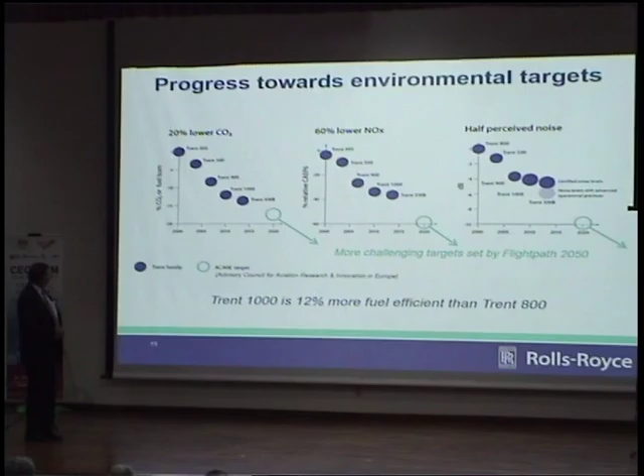Our Trent 1000 engine is 12% more efficient than that first engine. You can see the XWB is even more efficient, as I said earlier. Now, the designer is wrestling all the time with this. It's not possible to minimize all of these things at the same time.

There are basic laws of physics that say if you push down fuel burn, something else will pop up and get a bit worse. So for instance, engine pressure ratio. At the core of the engine, we compress the air to 50 atmospheres. It gets very hot, so the higher that pressure, the more efficient the engine. That's a good thing. But as it gets hotter, when you add the fuel, you create more oxides of nitrogen because you're putting more energy into fusing that air together. So the NOx will get worse as the CO2 gets better.

Bypass ratio is the amount of air that passes down the outside of the engine compared to what goes through the core of the engine. Again, if we make that bigger, we know the engine gets more efficient, but the drag of the aircraft goes up, so we burn more CO2, but then the noise comes down. A big fan turning slower makes less noise than a small fan turning fast.

Although I'm not going to talk more about it today because it's still a very contentious area, the creation of cirrus clouds and contrails from aircraft itself can create global warming, and by flying lower and through different air paths, you can reduce the amount of contrails produced, but at the same time you'll burn more fuel. So no free lunch in any of this is the short message.

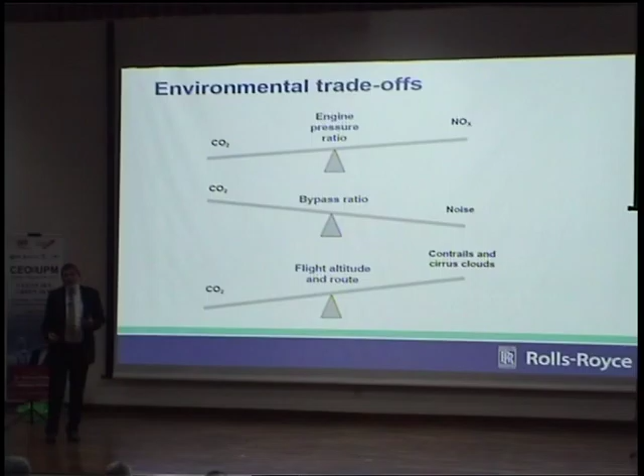Alternative fuels—I mentioned biofuels. Malaysia is particularly strongly placed and has some excellent research in this area, with potential to make biofuel directly from palm oil and from algae, among many other projects going on here.

We've said all along that biofuel must first of all be safe. You could fly an aircraft on vodka if you wanted to—not the pilot, but the engine itself. You could fly an aircraft on vodka, but that wouldn't be safe for the passengers or for the aircraft, and actually the tanks would freeze up at high altitude, which wouldn't be good at all. So you need to make sure any biofuel has the same physical properties as today's fuel. In fact, most certification at the moment is limited to just 50% biofuel mixed with conventional fuel, so you're not allowed to run totally on biofuel.

The second issue is sustainability. Not everything that says bio on the can is good for you, and you have to really look in great detail. If somebody says, I've got a great biofuel, you have to ask: how did you make it? How much energy did it take to create this fuel? How far did you transport the biomass by road before turning it into a biofuel? All of those things are actually taking away. The whole philosophy of biofuel is that when the plant's growing, it sucks in carbon dioxide from the atmosphere. When you turn that plant into fuel, you let the CO2 back out, and that should be a neutral process. But if you create yet more CO2 in creating the fuel in the first place, you're not necessarily doing the right thing.

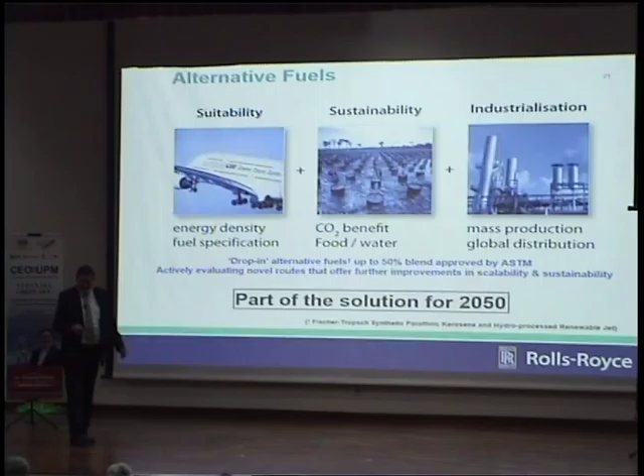So let's have a look at the jet engine, because as I said, it really is—I've been around them for 36 years now, my whole time with Rolls-Royce—but I'm still amazed by them, and hopefully I can convey to you some of the amazing technology that's in there.

So some great things are happening. We suck in about a ton of air to a modern engine. Most of that doesn't go through the core of the engine at all. Most of it goes down what we call the bypass and produces most of the thrust for the aircraft. Think of this fan on the front just like a big propeller.

It's pushing the air backwards and therefore pushing the aircraft forwards. A small part, about 10% of the air, goes through the core, and the Rolls-Royce product is unique in that it has a three-shaft design. So this big fan on the front is turned by a low-pressure turbine at the back. This first set of compressors is turned by its own intermediate pressure turbine, and then at the core of it, you have the high-pressure compressor turned by its own high-pressure turbine, and this is where all the magic happens.

So you suck a ton of air in the front, you add just 7 pounds of fuel per second to each ton of air, and that creates the magic. A little controlled explosion goes on here. The temperature, by the time you get to this point, is already around 700 degrees Celsius. Steel is glowing red hot at that temperature, and that's just by compressing the air. Like if you put your thumb over the end of a bicycle pump and press hard, your thumb gets quite hot. That's all that's happening here.

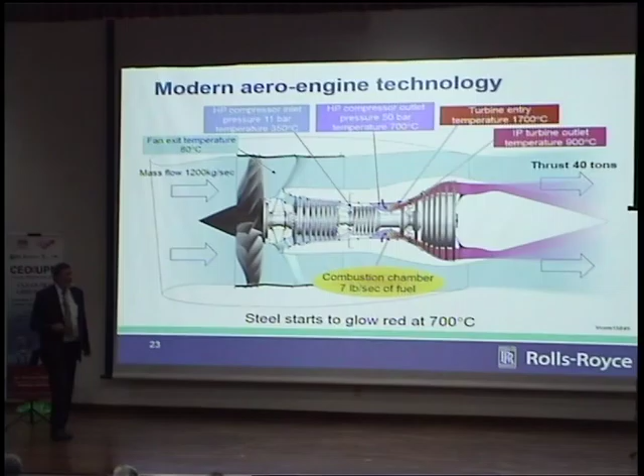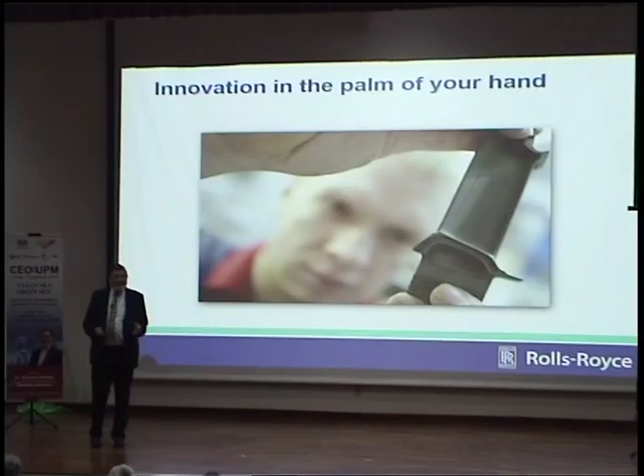So, imagine you could hold the entire power of a Formula One racing car in one hand. That's what this guy's doing here. That single blade from the high pressure turbine produces the same power as a Formula One racing car. So that in itself is pretty incredible. There are some even greater facts around it.

The temperature, 1700 degrees C, is actually 400 degrees hotter than the melting point of the metal. So fundamentally unsustainable. You've got this blade sitting there in a gas stream that's trying to melt it and flush it out the back of the engine. And it's only protected by air cooling and sophisticated ceramic coatings that save it and protect it.

The tip speed is over 1,000 miles an hour, so faster than the speed of sound. And the stresses are equivalent to hanging a double-decker bus off the end of every single blade. So you imagine all that, and that's really driving the materials technology to the limit. This blade is made out of just one crystal of a very sophisticated nickel alloy, grown in the shape of the blade. So that gives you the ultimate in material strength and properties.

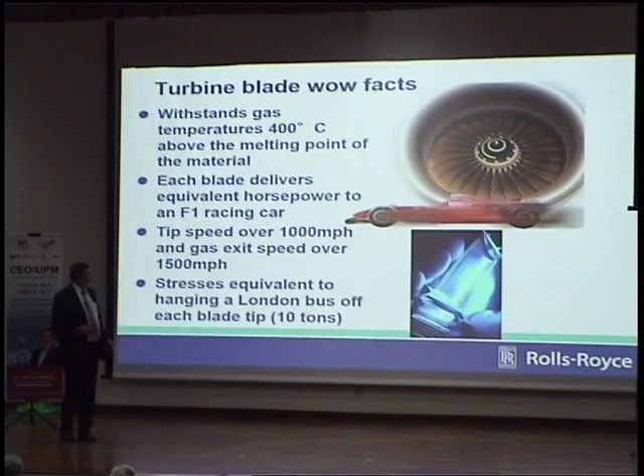So I'm now going to take you on a little journey through the jet engine to describe in more detail what's going on. And the video should start automatically, but it's not doing. Could you start the video?

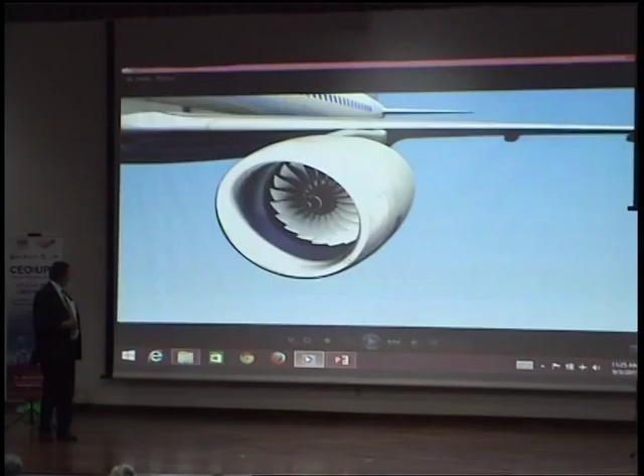Okay, so here we go. We're a little molecule of air, flying in the front, and we're going to get sucked in with a ton of air into this engine. Most of the air is going to go down the outside, but we're going to have a look at what's happening right inside the engine.

So as we go through the big fan blades, already we're getting compressed by that fan, about 1.8 atmospheres and 100 degrees more temperature, into the guide vanes and down a steep slope into that first stage of compression, the intermediate pressure compressor. Here we can see the blades coming up, first stage, second stage, 8 stages in total, compressing the air to around 10 atmospheres and about 400 degrees centigrade.

And so we carry on through till we get to the back of the intermediate pressure compressor, which is coming up shortly. And then down another steep slope, and now into the high pressure compressor. So this, very small blades because the air is getting squashed down and smaller. As we go through these 6 stages of high pressure compression, we're getting squashed and squashed until we're at 50 atmospheres of pressure and 700 degrees centigrade.

So as we come to the far end, we can see ahead of us the combustor. That green stuff in there, that's the fuel being added. So we're going to go in there, we're going to meet a particle of fuel, and bang, we catch light. We go on, and then as we look around, we can see everything's glowing red hot. It's pretty warm in there.

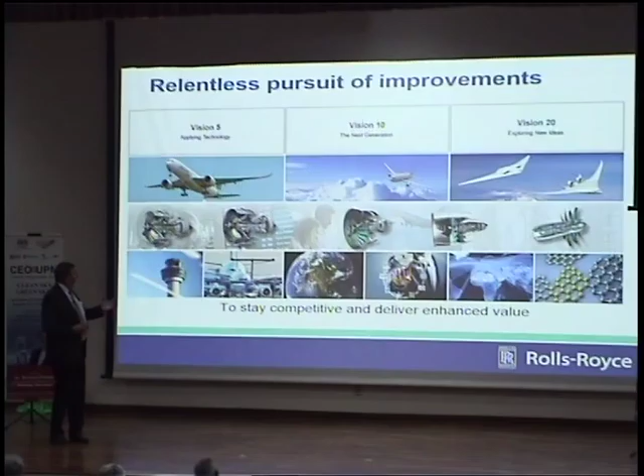And Vision 20 for the long horizon, that's when we can work with our research partners on sometimes what seems some crazy ideas for the future, but as you get nearer, they become stronger and more realistic. So we lay out our technology in that way for the future.

So here's one of our latest engines, the Trent 1000, and you can see some of the ways that we're able to contribute to efficiency. The hollow fan blade here is very lightweight, very robust, very strong, and very efficient at doing that first stage of compression. All of the core components are optimized for their aerodynamics to make them as efficient as possible.

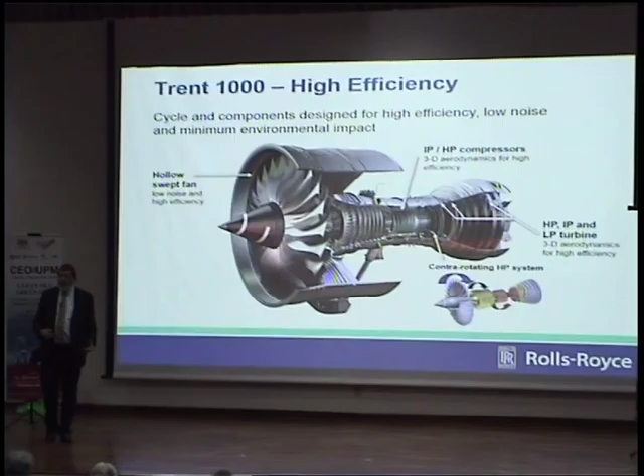And interestingly, this fan case that has the job of stopping the blades if one of them does break, that's shortly coming to be manufactured here in Malaysia with a deal we've done with UMW, which I'll talk about later.

But if we look at the next engine, the XWB, just 4 years after the Trent 1000, all of these are new technologies. So you can see the pace at which we have to inject technology in every new engine that comes along. An even more advanced fan blade, intelligent health monitoring, 3D aerodynamic design in the compressors, what we call blisk technology.

Conventionally, compressor blades slot into the disc and are just held in there by centrifugal force. But if you weld the blade to the outside of the disc, you can make the whole disc 30% lighter because you don't need those location features. So that's increasingly what we're doing with what we call blisks.

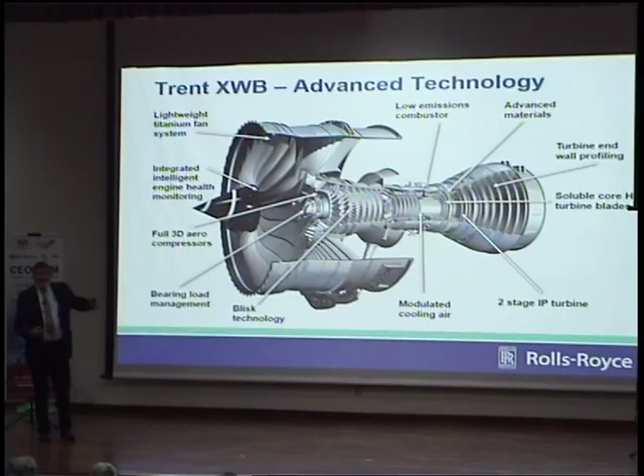By only using the cooling air when you need to, and switching it off when you don't need it or reducing it, then you can save fuel. The low emissions combustor is coming along, as I said, advanced materials in the turbines, and some new manufacturing technology around the HP turbine. So all of that in just 4 years into that new engine. But the development of that technology had taken 10 or 15 years before that.

So as we go forward, this is today's latest engine, the Trent XWB. As we move forward, we're going to change the internal architecture of the engine quite a bit in what we call the Advance. That's going to be available in 2020. Still a 3-shaft engine, but with a different balance of work between the intermediate pressure compressor and the high pressure compressor. Pressure ratio going up still further to 60 atmospheres. That means the whole core of the engine's getting hotter and at higher pressure. And fuel burn compared to the first Trent engine, about a 20% improvement.

And we're already looking beyond that to 2025, a new engine called the UltraFan, so a much bigger fan still, quieter, more efficient than before, but now with a very high bypass ratio, so 15-to-1 - 15 times as much air going down the outside as goes through the core, compared to around 10-to-1 today. And 70 atmospheres now at the core, and another 5% of fuel saving.

So 5% may not seem a lot, but 1% of fuel is worth $1 million per aircraft per year. So an aircraft burns a lot of fuel. And similarly, it's worth a lot of tons of CO2 per year.

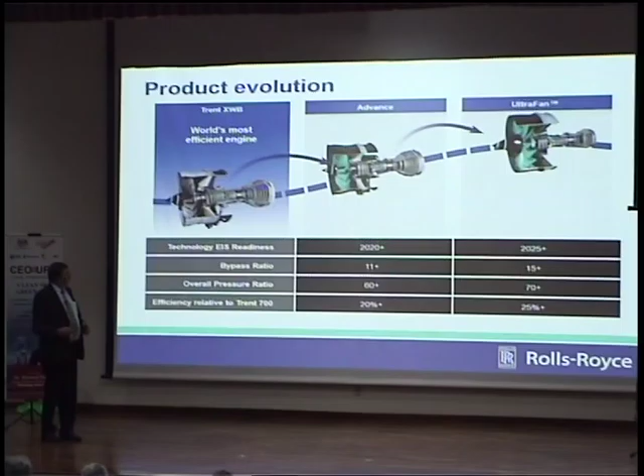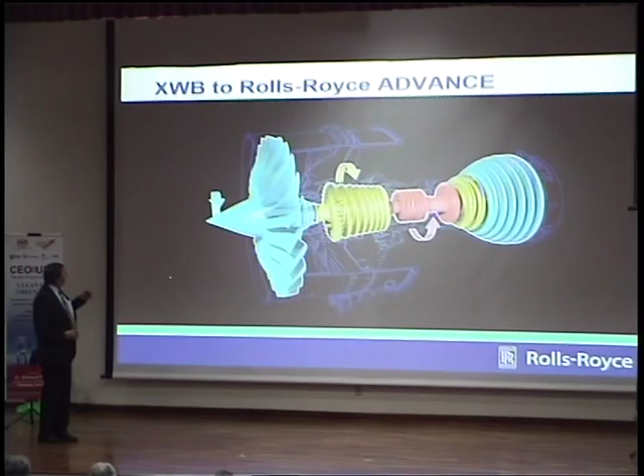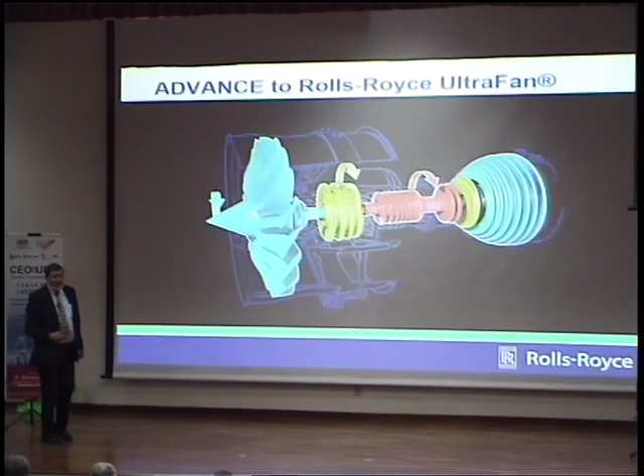So this is our new engine, the Trent XWB, and you can see the internal architecture. And this - again I think the video is not going to work - but anyway, as we go from the XWB, it looks like this, to the Advance, then the critical thing is we've reduced the number of intermediate pressure compressor stages, we've taken that out, and we're doing a lot more work now with 10 stages on the high pressure compressor. So a big change in the balance, and then as we go from that to the UltraFan, we need all these new technologies to help us get there.

Very high bypass ratio enablers, advanced core architecture, new materials. As I said, all the history of the jet engine's been dominated by new materials. So ceramic-based composites used right in the heart of the engine - ceramics can take even higher temperatures than the metals. New lightweight materials for the back end of the engine, still very hot, 600, 700 degrees centigrade, but using titanium aluminide instead of nickel, you save a lot of weight.

And lean burn combustors, so the cleanest combustor we have, to meet those 2020 targets. Lightweight structures such as the fan, moving from a hollow titanium fan to a carbon composite fan. Intelligence in the engine - high performance computing plays an important part. Being able to build and test an engine inside the computer instead of making it and testing it in reality saves time and saves a terrific amount of money in the test program.

So investment in high performance computing is a critical enabler for all this, and then you have to be able to generate the aerodynamic predictions that go with that. And finally, another big and important area is advanced manufacturing. This again is an area where we want to work together in Malaysia, a program we call the Factory of the Future, to look at some of these manufacturing technologies for the future.

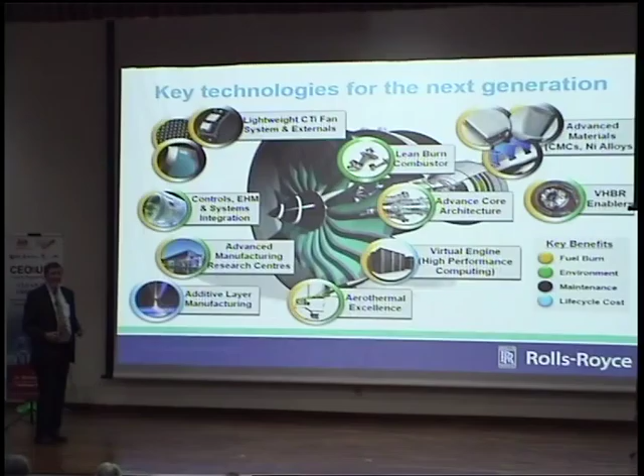So let's just look in detail at one or two of those. This is our composite fan blade - a carbon composite material. It's made of polymers with carbon fibers running through it to make it strong. It's very good and does the work in a much lighter way, particularly as you get larger than the titanium blades.

The only thing it's not good at is stopping birds. The carbon composite, if you get a bird in the front, is going to break up. So we still use some titanium, which is why we call it the composite titanium fan blade, just to protect the leading edge, enough to deflect stones and birds and anything else that tries to get into the engine.

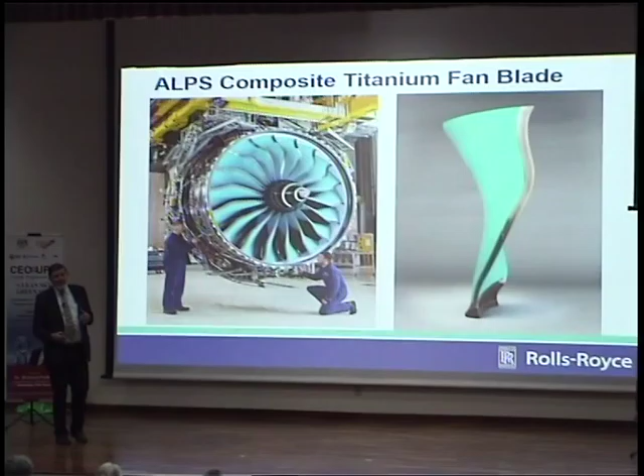In the R&T world, we have to not only create the technology, but prove it. So we built a whole fan set, and about a year ago, we flew it for the first time in Tucson, Arizona, on our own flying test bed. You can see the 747 aircraft here.

And you can actually see the terrific difference. These are the Rolls-Royce RB211 engines from 30 years ago, and this is today's engine. Look at the difference in size - it's huge. In fact, we had to jack the undercarriage up a bit just to stop it scraping along the floor when it landed. So it was quite a challenge.

And manufacturing technology - this is one of the structures. It's that front structure we went through just behind the fan that goes down into the engine. It's about 1.6 meters in diameter. And this, we think, is one of the largest objects yet made by what's called 3D printing.

So 3D printing's been around for a while, making things out of plastic to demonstrate design concepts. But now you can do 3D printing directly in metal, with titanium, with aluminum, with steels. Once you can design something in the computer, you can just tell the machine, okay, print me one of these. And this vane structure, which was on the front cover of Flight magazine in March this year, is made of titanium, printed with electron beams from powdered titanium.

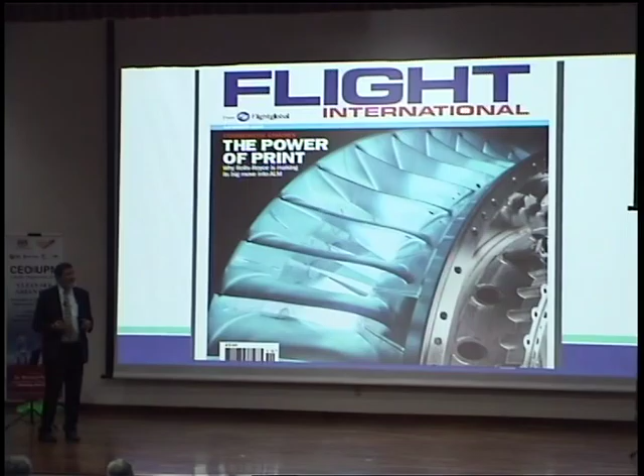Really it liberates the thinking of the designer, because many of the traditional manufacturing technologies like casting and forging constrain the design in some way. But with 3D printing, if you can imagine it, you can make it. You can make spheres within spheres without being able to see what's happening in the center. So really very exciting technology for the future.

Going beyond the UltraFan, then we can see other types of engines that may happen or may not happen. As I said earlier, prediction is very difficult. But what we call the open rotor is really going back to propellers. We didn't go away from propellers because they were inefficient - they are actually quite efficient. We went away from propellers because they couldn't fly high enough and they couldn't fly fast enough.

Now, if you put two propellers in a row - one of the problems with a propeller is as the air goes through it, the air itself starts to turn around. And that momentum that's turning the air around is not terribly useful. It's trying to flip the aircraft over, not pushing the aircraft forward.

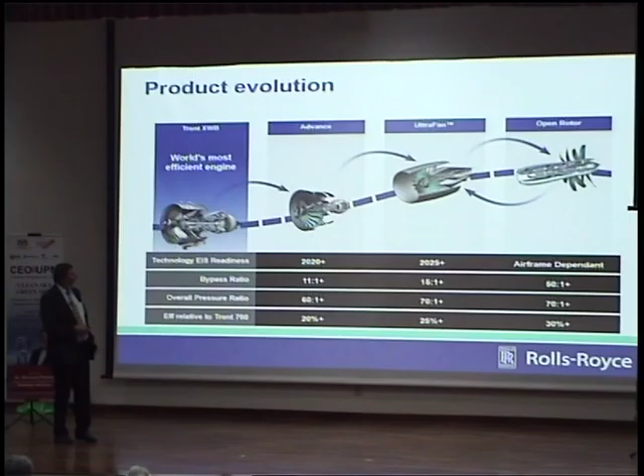But if you put another propeller right behind it, turning in the opposite direction, that'll continue compressing the air, but straighten it out again. So you now get all the momentum, and you get something that can fly as high and as fast as a conventional jet engine, but with an even bigger fuel saving, because the larger the mass of air you can put through - if you grow this fan up to 4 meters in diameter, then all of this outer casing gets too big and heavy, increasing the drag of the aircraft. If you get rid of that casing, you make a lighter, more efficient engine.

So what's the problem? Why don't we just do that? Well, unfortunately, as I said earlier, there's no free lunch. So if you make something more aerodynamically efficient, it will have penalties elsewhere. These are some of the concepts we've been working with.

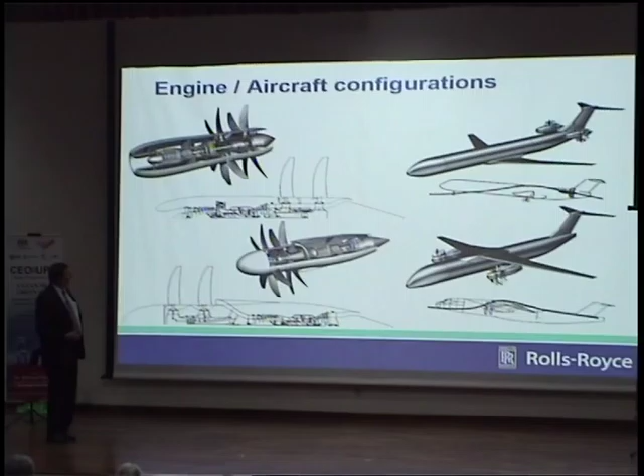We've worked with Airbus in particular on concepts like this, where the engines are mounted at the rear. And we've worked with Boeing on aircraft where the engines are mounted conventionally. But again, because these are so big, you wouldn't be able to get the aircraft on the ground unless you lift the wing up on top of the aircraft. So it looks interesting, certainly a challenge to the designer - not just the engine designer, but the aircraft designer - but it can be done. These are some artists' impressions of future aircraft with that technology in it.

This is not an artist's impression, it's a real photograph from 1986. At that time, they were called prop fans, not open rotors. They were much smaller than the ones we're talking about now.

Here you can see one actually developed by the Allison Engine Company, which Rolls-Royce bought. At that time we were looking at fuel efficiency - nobody'd heard about global warming or saving the planet. The reason was that oil had gone above $30 a barrel, and everybody thought the world was going to end. So every engine company started investing in these new, more efficient engines. Then oil prices came back down again, and everybody forgot about it and switched it off. So there's nothing new, really.

But with modern technology, we can make the fans much bigger and quieter and achieve the same endpoint.

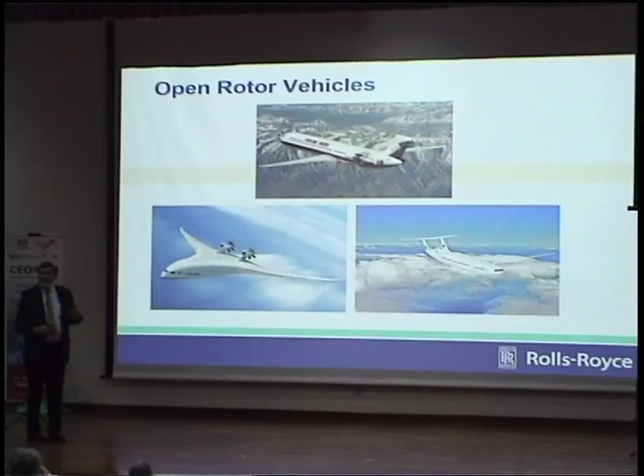If we go into the past and look at the older aircraft, they were much noisier than today, nearly 10 decibels more noisy. But that open rotor aircraft we demonstrated was indeed more efficient by about 15% compared to a conventional engine. So we know the efficiency is there, it's the other way around. That's the old MD-80, and this is the open rotor powered aircraft, about 15% more efficient.

Now, as we go into the future, we could do the most advanced turbofan, and we'd finish up probably 20 decibels quieter than today's engines that are flying around. And we could save quite a bit of fuel, probably around 15% relative to today's engines. But if we do the open rotor, we can never make it as quiet because there's nothing to catch the noise that comes off the tips of these fan blades. So once it creates some noise, it'll just propagate until it gets to the ground and upset people.

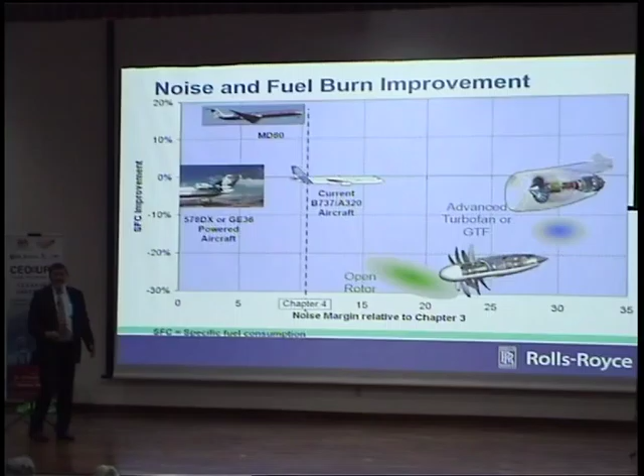But look at this, it's quieter than today's aircraft. So we're not saying we're going to make a noisier aircraft, we're saying we could make a quieter aircraft than today, but not as quiet as technology would allow it to be. And that's the political debate that's going on out there. Frankly, it's not a technological debate - we know how to do both of these for the future, but somebody has to make some tough decisions. Do you want your aircraft as quiet as possible so you don't upset people near airports? Or do you want your aircraft quieter than today, but producing 10% less carbon dioxide and helping to save the planet? I'll leave that for the politicians to discuss.

So there are all sorts of other technologies out there - the open rotor, more integrated design. This was an interesting design: Rolls-Royce, Cambridge University, and MIT doing something called the silent aircraft, making an aircraft as quiet as possible. It was never totally silent, but it was a very, very quiet design. But again, the fuel efficiency was not good. So we're having this fight all the time - by fully embedding the engines inside the aircraft, you can absorb most of the noise that comes out, but it'll never be as efficient.

Advanced cycles - we're nearing limits on the fundamental gas turbine efficiency, but we know from ships that with advanced gas turbines, with intercoolers, with recuperators, we can make them much more efficient. But those devices today are very big and heavy - you'd never get an aircraft engine into the wing. So one of the technology areas is to look at advanced heat exchangers, very compact heat exchangers, so you can play with the heat in the gas turbine cycle, manage that heat efficiently and effectively, and make the engine even more effective.

New forms of combustion: today, the combustion just gets the air hot, it doesn't contribute any useful work. But pressure gain combustion, pulse detonation is another form, can actually get some useful work out of the combustor, so you can drop some of the input compression stages. And already on military engines, we're looking at morphing technologies that can physically change the shape of the engine depending on whether you want to fly very fast or slower and save fuel - physically changing shape as the engine flies.

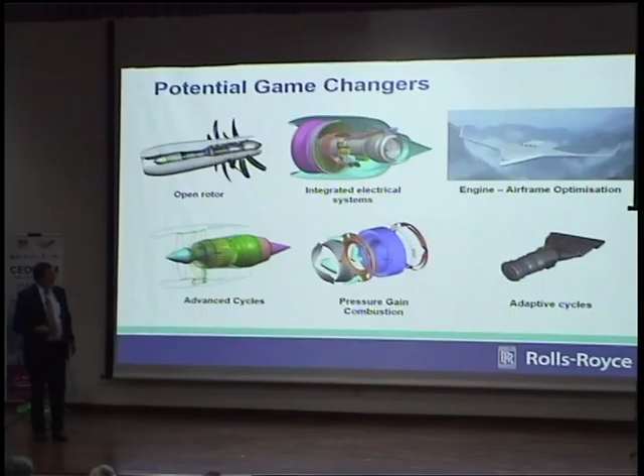So let me finally talk a little bit about collaboration, because I think that's something of interest. First, an example from Europe - I'm the chairman of the board of a program...